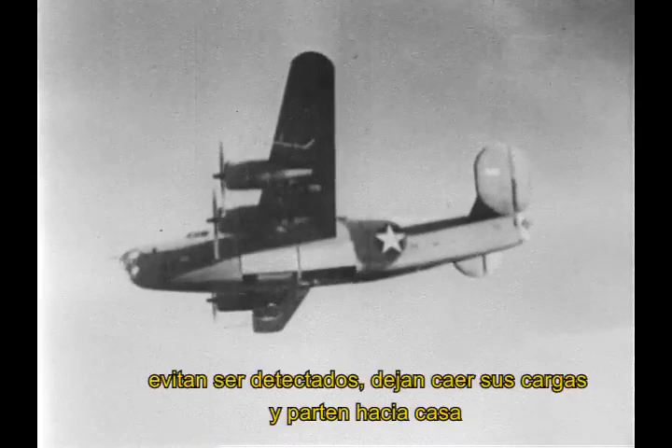A heavy bomber squadron takes off on a long-distance operation against the enemy. Flying with great speed at high altitudes, they avoid detection, drop their loads, and are off for home before enemy fighters and pursuit planes can possibly climb 25, 30,000 feet or even higher. In these cold substratosphere regions of the sky, where the air is so thin it affects engines as well as men, the fastest enemy planes are no match for our B-17 or our B-24s, which return safely to their bases.

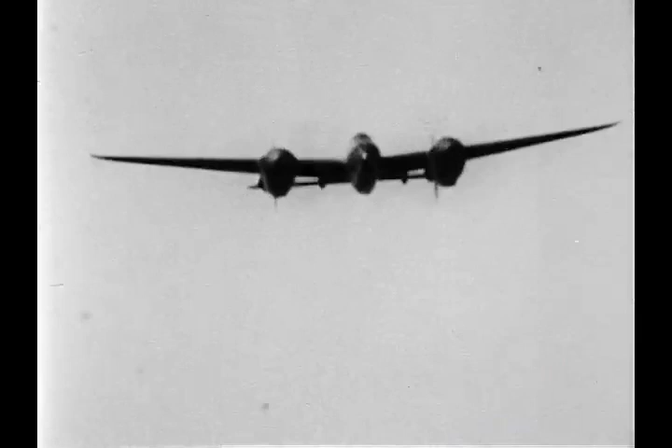Air supremacy is a vital factor, perhaps the deciding factor in this war. The achievement of air supremacy involves speed, personnel, firepower, and maneuverability.

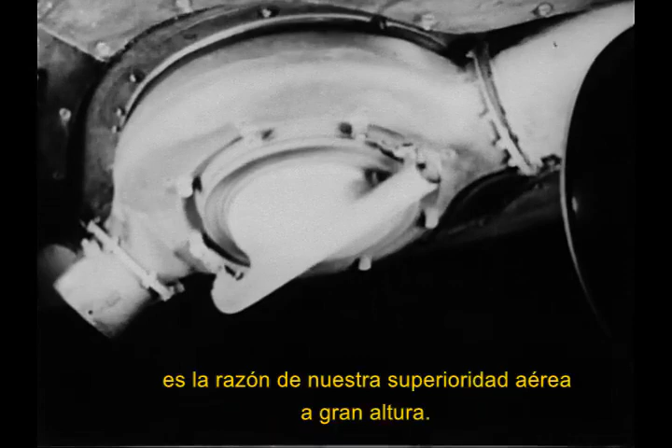But one of the most important factors is the ability to achieve maximum altitude without the loss of power. The Civil War maxim of getting there fastest with the mostest men can be revised in terms of military aviation to getting up higher with the mostest fighting power. This master of the skies, the dynamic turbo supercharger, is the reason for our air superiority at high altitude.

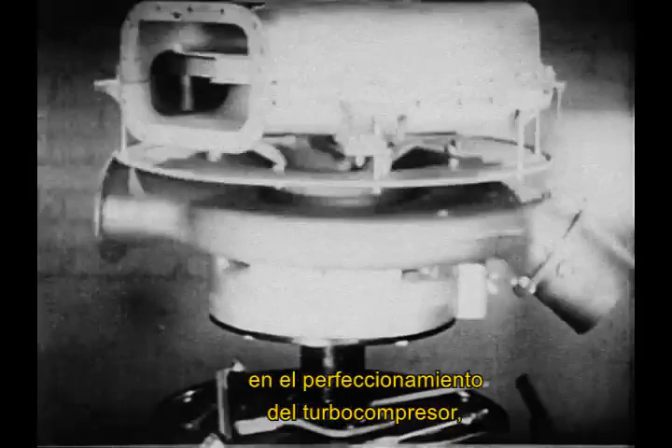For the year 1941, the Collier Trophy, one of the highest honors in aeronautics, was awarded jointly to Dr. Sanford A. Moss and the Army Air Forces for 25 years of collaboration in perfecting the turbo supercharger, which is playing a leading role in sweeping our enemies to defeat.

The turbo supercharger makes possible high-altitude flying with full engine power. An airplane engine derives its power from explosion of a mixture of air and gasoline. At altitudes above sea level, the air gets thinner and thinner. Therefore, these explosions get weaker and weaker.

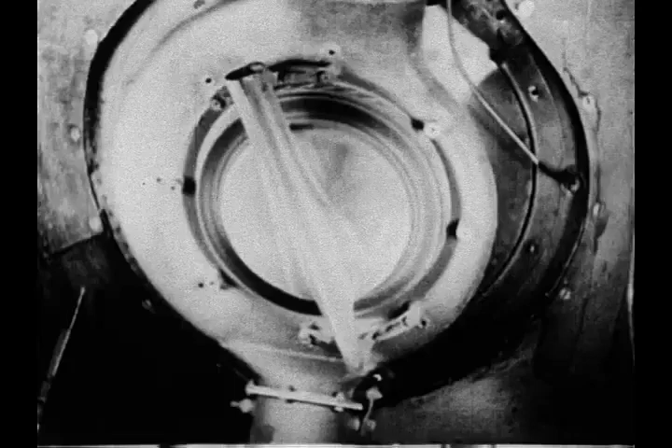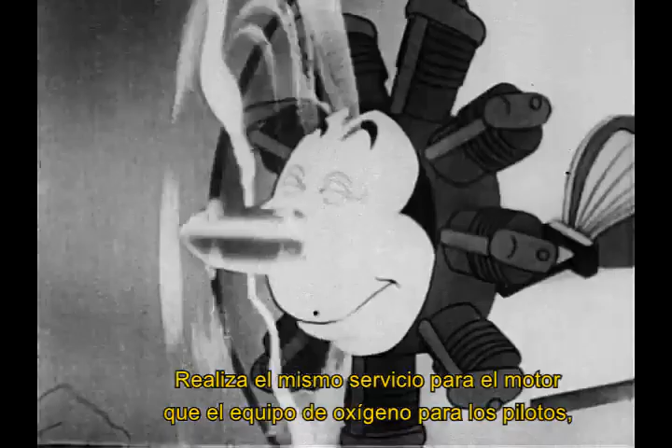At 20,000 feet, an unsupercharged airplane engine gives but one-half its normal power. At 35,000 feet, only a quarter of its power. The turbo supercharger counteracts this loss of power by compressing and cramming air into the engine, thereby maintaining proper manifold pressure to give full power at high altitude. It performs the same service for engines that oxygen equipment performs for pilots, kidding the engine into thinking it is always working at sea level.

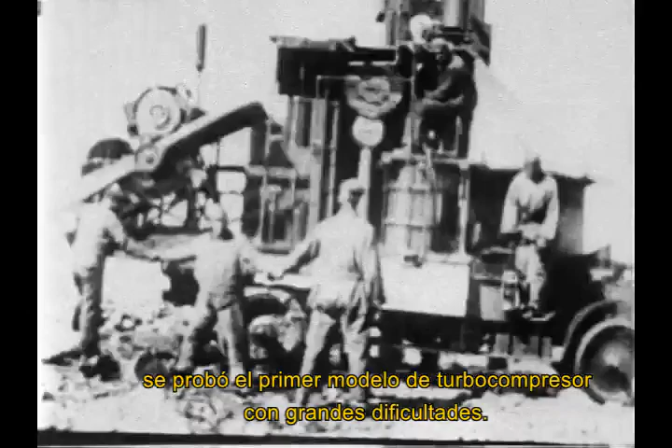Without a turbo supercharger, the engine gasps for breath. During World War I, the first model turbo supercharger was tested under great difficulty, on a truck at the summit of Pikes Peak, 14,100 feet above sea level.

The Liberty engine developed 400 horsepower at sea level, but moving up to 14,000 feet, it dropped to 265 horsepower. Then the turbo supercharger not only boosted it up to 400 horsepower, but to 410, or 10 more than normal at sea level.

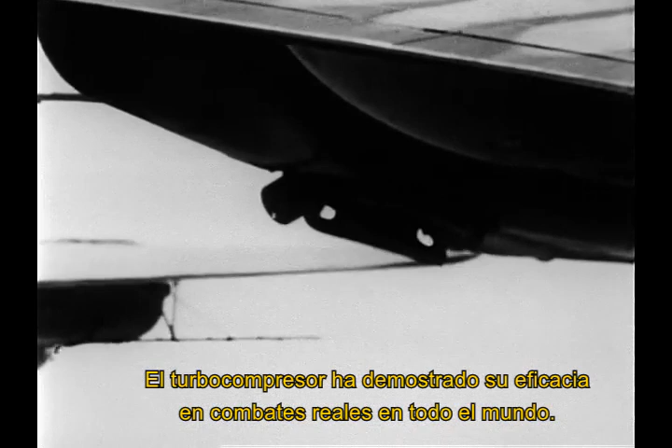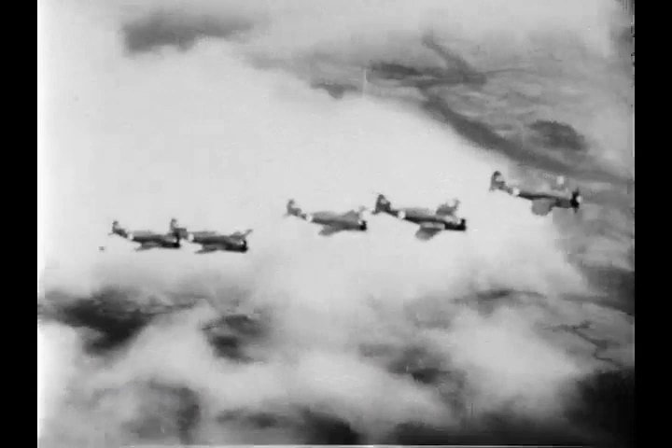The turbo supercharger has demonstrated its worth in actual combat all over the globe. Our great bombers, the Boeing B-17 Flying Fortress and Consolidated B-24 Liberator, together with the Lockheed P-38 Interceptor, the P-43 Lancer, and the deadly Republic P-47 Thunderbolt, are all turbo supercharger equipped, which enables them to fly and fight effectively at great heights above the earth.

Our turbo supercharged interceptors and pursuit planes can get on top and stay on top of anything the enemy has to offer. These tactical advantages are the key to air supremacy and ultimate victory.

Turbo superchargers permit our bomber pilots to avoid bad weather, even storms, by climbing over them, making it possible to fly at altitudes and speeds which result in maximum engine efficiency.

Obviously, we have a decided edge when we can bomb the enemy with a minimum of danger to our planes and personnel. Flying turbo-supercharged planes, our boys have bombed enemy objectives with amazing accuracy from heights where they were invisible and unheard from the ground. There had been no warning sirens, no opportunity to take shelter, only the sudden scream and paralyzing flash of falling out of a clear sky.

Almost without exception, these planes have returned safely from their mission. Time after time, you have read of our big bombers returning unscratched from perilous raids in all theaters of the war. It is true that our heavy bombers have been in dogfights, have suffered casualties in men and planes, but...

In practically every instance, this has happened when planes were operating at levels below 25,000 feet. Another reason we have to get up higher and higher is to get above the effective range of anti-aircraft fire, which has been reported even above 30,000 feet.

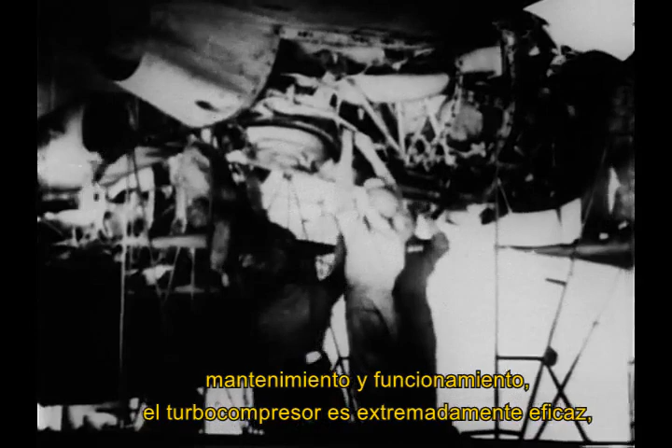With proper care in installation, maintenance, and operation, the turbo supercharger is extremely effective, reaching its full power and efficiency at 25,000 feet or higher.

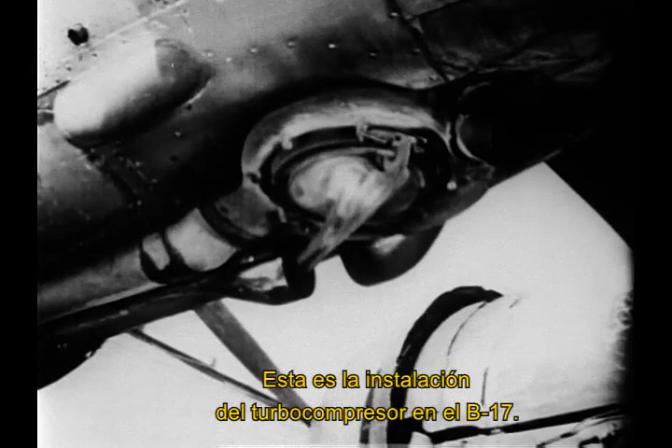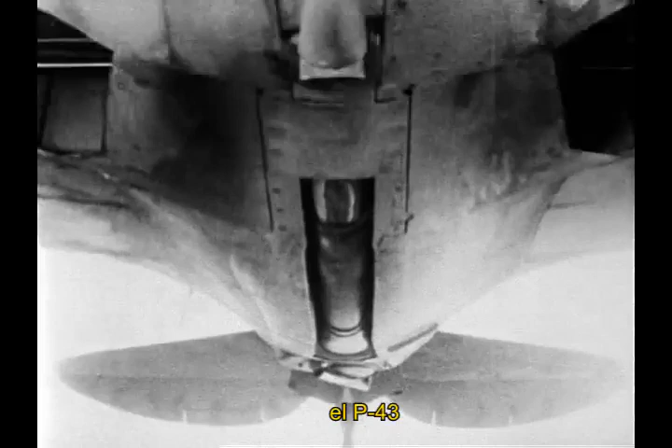This is the turbo supercharger installation in the B-17. Installations vary according to the different types of ships, such as the B-24, the P-38, the P-43, and the P-47, where it is submerged in the fuselage.

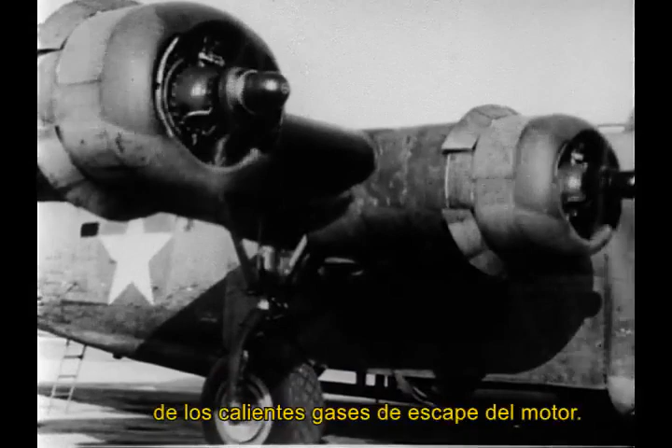A turbo supercharger is driven by the terrific impulse of hot exhaust gases from the engine. It largely uses waste power.

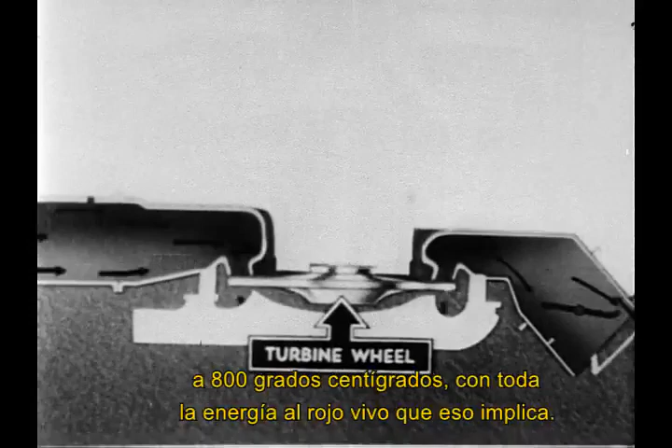Waste exhaust gases pour into the nozzle box, where they are directed onto a metal windmill or turbine wheel at 1,500 degrees Fahrenheit, with all the red-hot energy that implies.

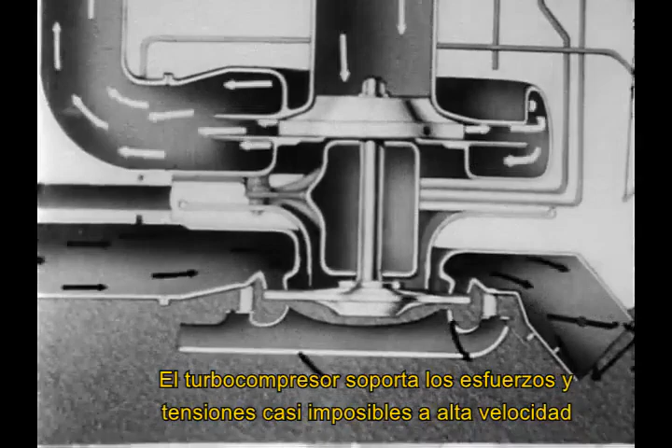This blazing force spins the turbine wheel at terrific speeds, up to about 20,000 revolutions per minute. The turbo supercharger stands the gaff of almost impossible high-speed strains and stresses, and still performs its task at temperatures ranging from 1,500 degrees above to about 67 degrees below zero Fahrenheit.

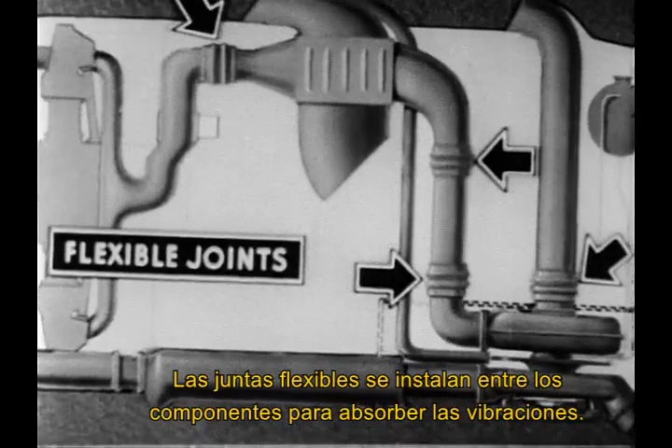The basic principle of all turbo supercharger installations is outlined in this diagrammatic drawing. Flexible joints are installed between the component parts to absorb vibration.

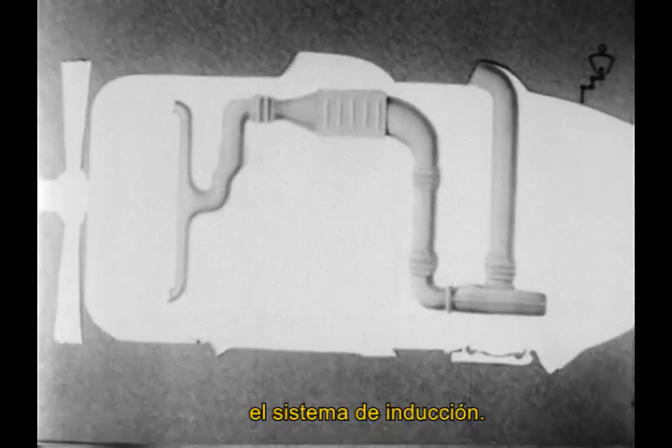For purposes of clarity, we will divide the system into 5 parts: 1, the induction system. 2, the exhaust system. 3, the ventilating or cooling system. 4, the control system. And 5, the lubrication system.

Individual installations vary according to the different design of ships, but their functions remain the same.

The induction system comprises rammed air intake in the engine nacelle or in the leading edge of the wing. The speed of the plane rams air into these intakes and assists in keeping up pressure.

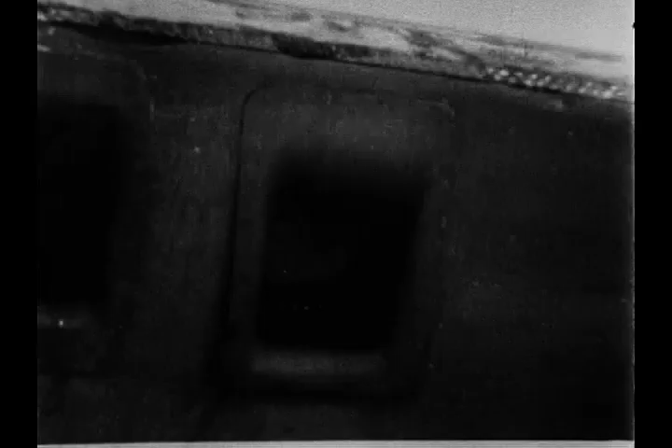Ducts carry this air to the compressor, where it is compressed and forced through the intercooler and the carburetor to the inlet of the geared supercharger.

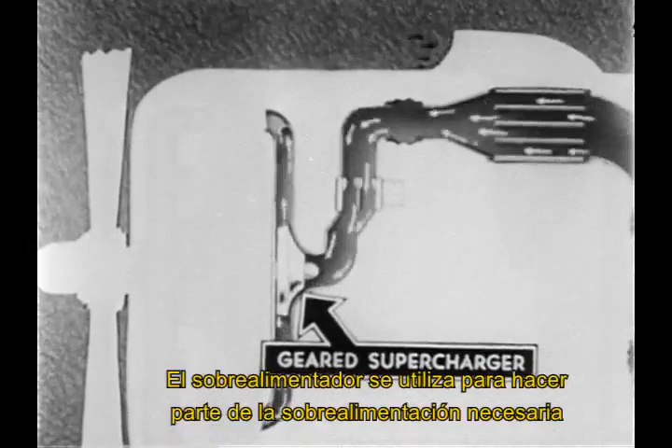The geared supercharger is used to do part of the required supercharging and to improve the distribution of the fuel charge to the cylinders.

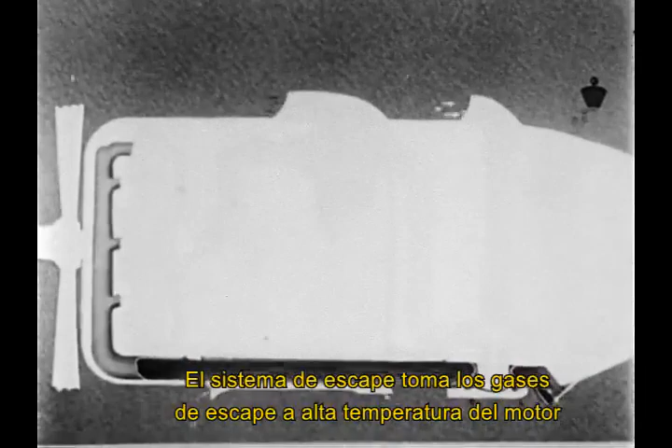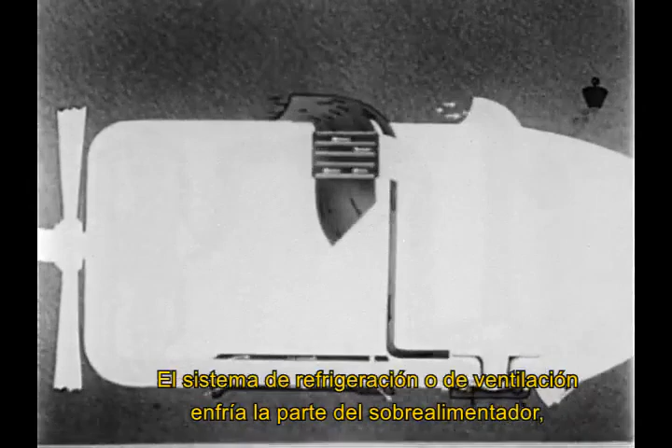The exhaust system takes the high-temperature exhaust gases from the engine to turbine wheels or out through the wastegate to the atmosphere. The cooling or ventilating system cools the supercharger parts, thus preventing damage due to the high-temperature exhaust gas.

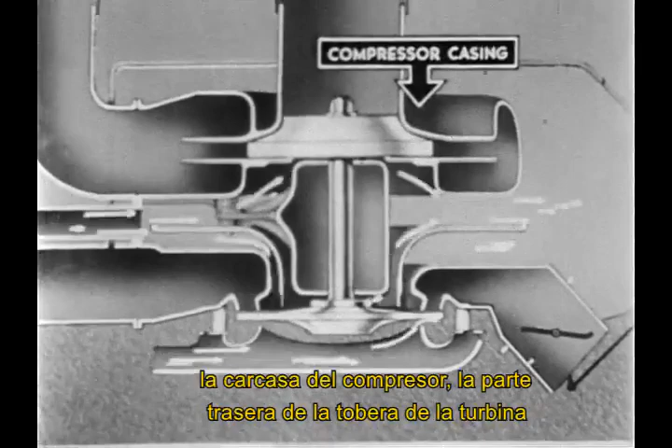Rammed air is carried through ducts to the turbo, where the stream is split by the baffle plate and cool air forced against the bearing housing, compressor casing, the back of the turbine nozzle box, and the back of the turbine wheel. Other ducts perform the same functions in relation to the exhaust stack shroud, which insulates the exhaust stack,

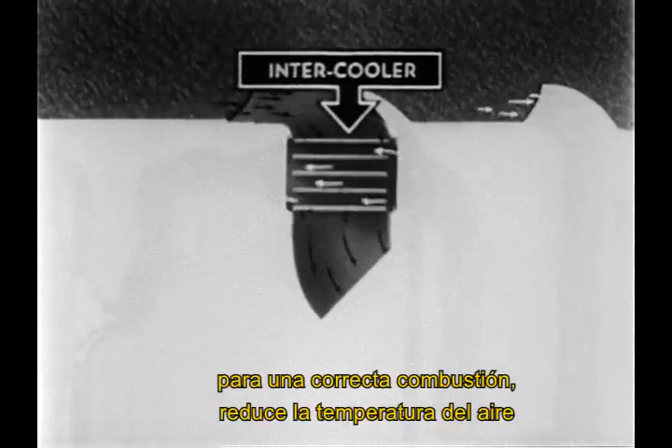and the air intercooler, which for proper combustion reduces the temperature of the air fed from the compressor to the engine. The intercooler cools air in the same way the radiator on your car cools water.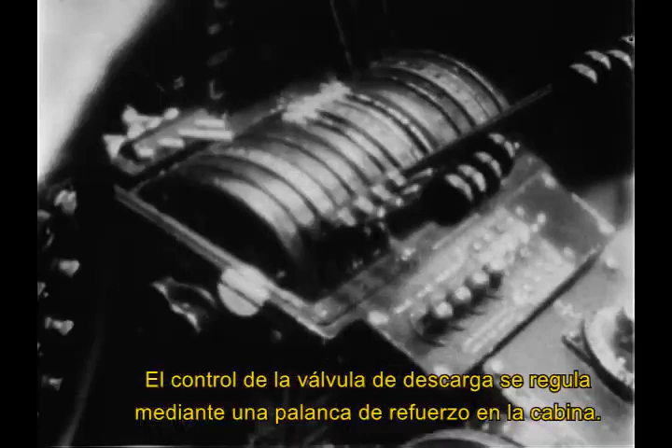The turbo supercharger is controlled by a hydraulic regulator, which operates the wastegate in response to pressure changes in the exhaust stack. The wastegate control is adjusted by a boost lever in the cockpit.

The wastegate controls speed of the supercharger by bypassing the gases around the wheel. With the wastegate open, the turbine will idle. Closing it by degrees enables the turbo supercharger to operate at required speed.

Lubrication is accomplished by a gear-driven pump. One element of the pump takes oil from the tank and supplies it under pressure to the moving parts. The second, or scavenging element, returns the oil to the tank.

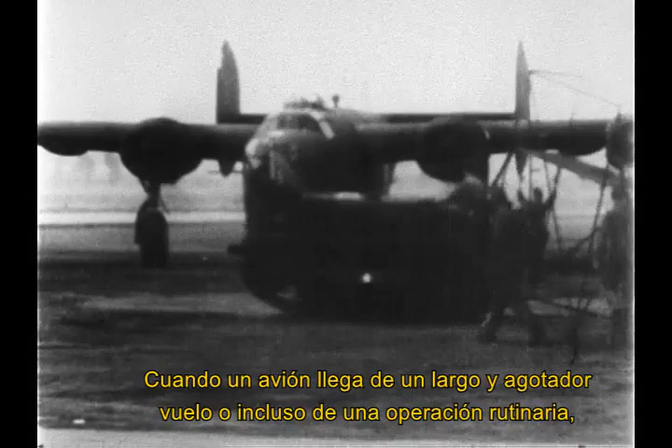When a ship comes in from a long, grueling flight, or even a routine operation, the pilot knows that the ground crew will assure the success of his next mission by a thorough inspection.

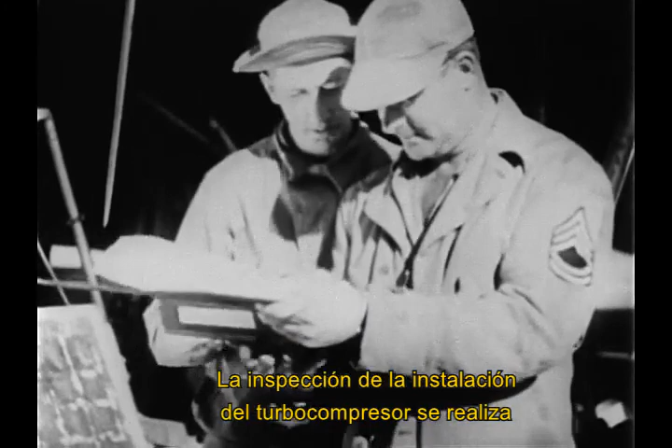The inspection of the turbo supercharger installation is performed in accordance with Army Air Force's technical orders.

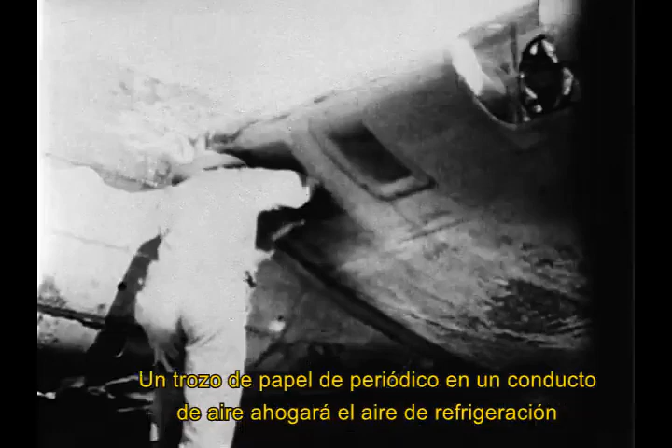Air ducts running from the nacelles or from the leading edge of the wing must be kept clear at all times. A piece of newspaper in a ram air duct will choke off cooling air, which is absolutely necessary for proper performance. Men are sometimes careless and step on louvers, blocking the flow of ventilating air. Ducting must be examined for broken connections, cracking, and chafing.

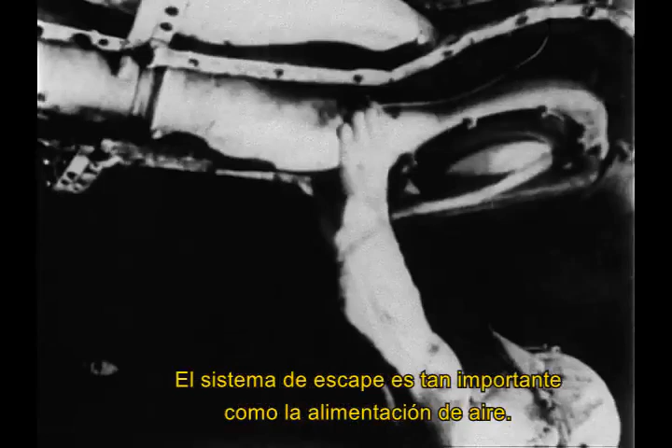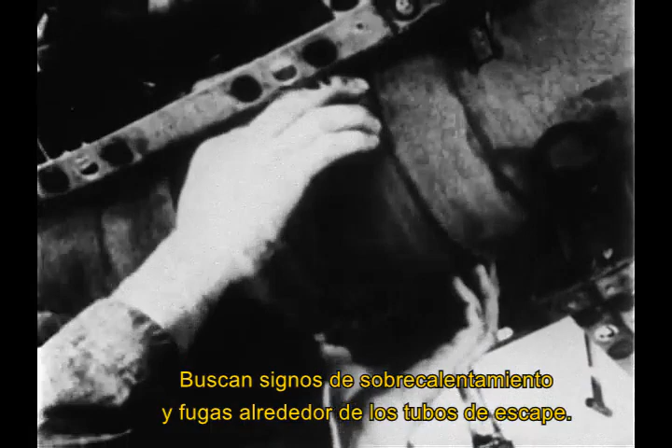The exhaust system is equally as important as the air feed. All joints in the exhaust system must be inspected for gas leakage, with special attention to flexible joints. Look for signs of overheating and leaks around exhaust piping. One small leak might rob the engine of that vital extra few miles an hour which marks the difference between victory and disaster. Leakage can be detected when the engine is started.

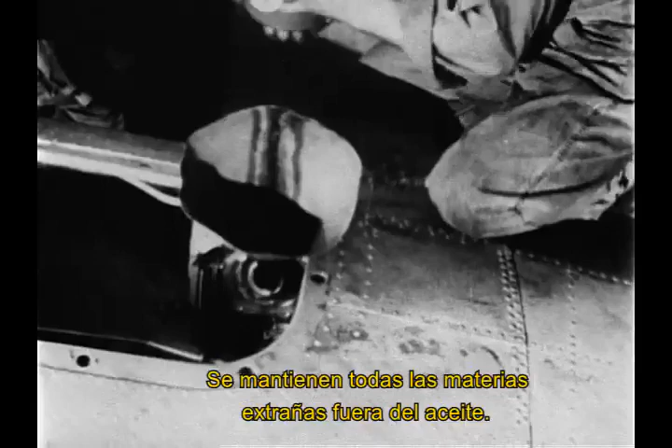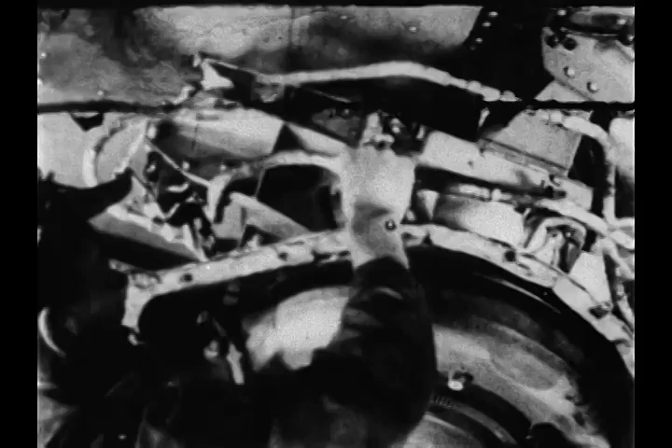In the lubricating system, check oil level in the tank. Keep all foreign matter out of oil. Note and record excessive oil consumption. Keep oil tank vent clear. Report signs of oil foaming or mist. Inspect all pipelines and connections, including the turbo supercharger regulator, for oil leakage and security.

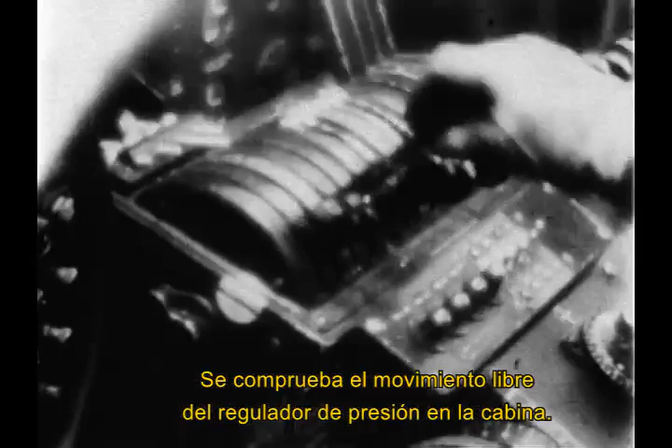When inspecting the control system, check free movement of the regulator in relation to open and closed positions of the wastegate. Check free movement of boost control in the cockpit. Be sure the turbo regulator locking device operates correctly.

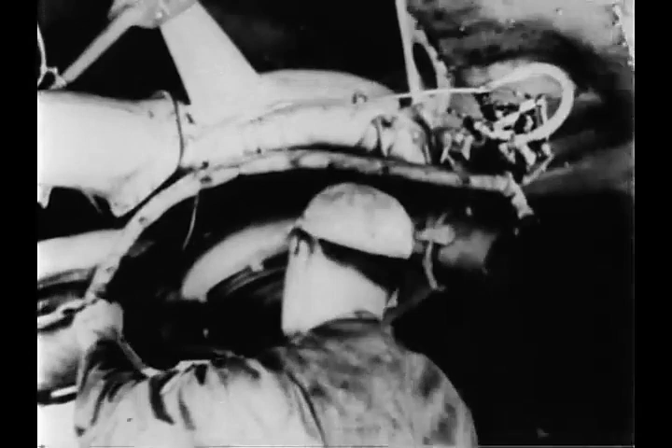The pressure regulating pipe should be disconnected at both the exhaust manifold and regulator. Blow air through and record any water condensation, carbon, or other foreign matter. Water will freeze and foreign matter clog the pipe. Test the pipe to make sure there is no leakage. See that the regulating pipe orifice in the exhaust manifold is free from carbon or corrosion.

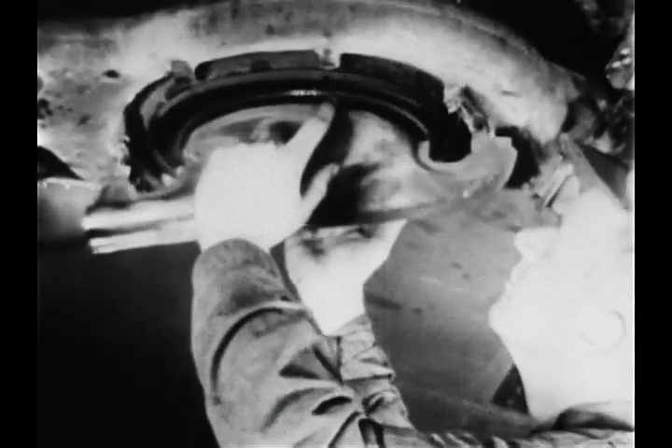Inspect the turbo supercharger to see that it is firmly in place. Inspect the nozzle box for deformation or cracking. Turn the turbine wheel by hand, feeling for any obstructions or tight spots. Listen closely for strange noises or rubbing, which might be caused by foreign matter on the back of the wheel. Examine the wheel for signs of overheating. Inspect the bucket for alignment and deformation. The cooling cap is always taken off and is replaced by a cover cap to protect the turbine wheel.

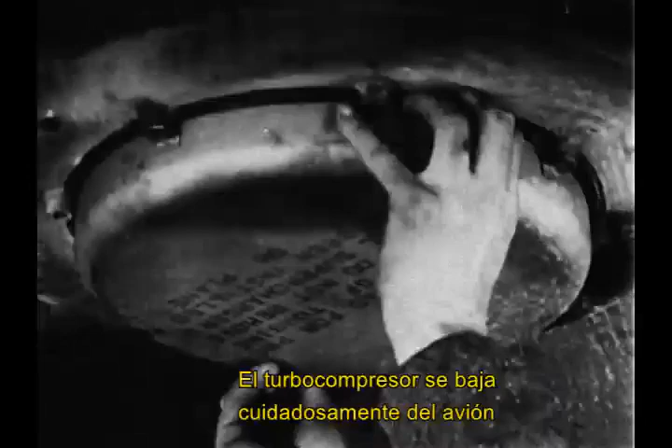The turbo supercharger is carefully lowered from the plane and starts its journey to the overhaul depot.

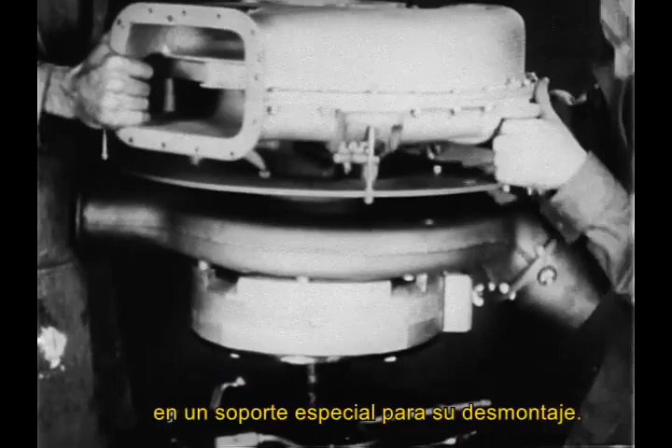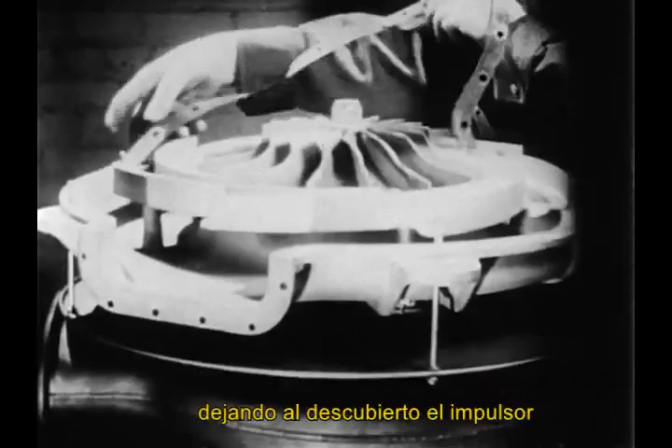At the depot, the supercharger is placed wheel down on a special stand for disassembly. After proper clearances are taken, the rear compressor casing and gasket are removed, revealing the impeller and diffuser. The impeller is on the same shaft as the turbine wheel and discharges air through the diffuser to the compressor casing, which collects the compressed air and feeds it to the engine.

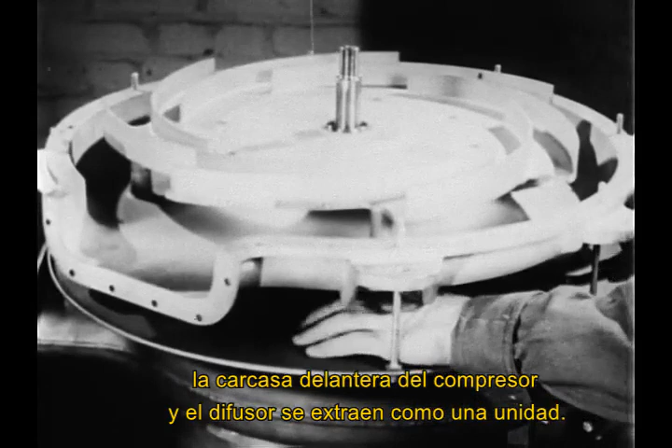After removing the impeller, the front compressor casing and diffuser are taken off as a unit. Note that we are working from rear to front, as the turbine wheel side is always called the front, regardless of position. This disassembly appears very simple.

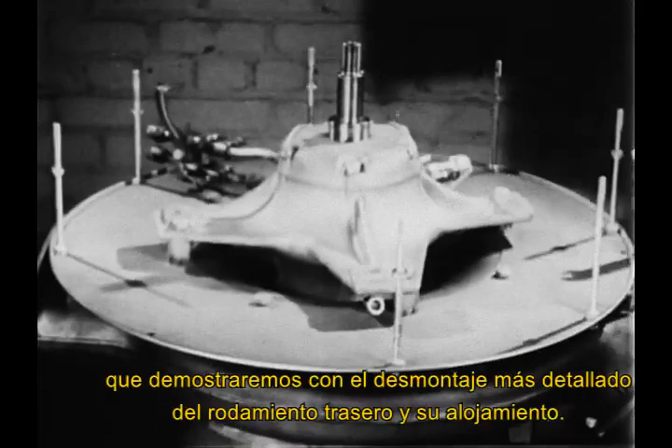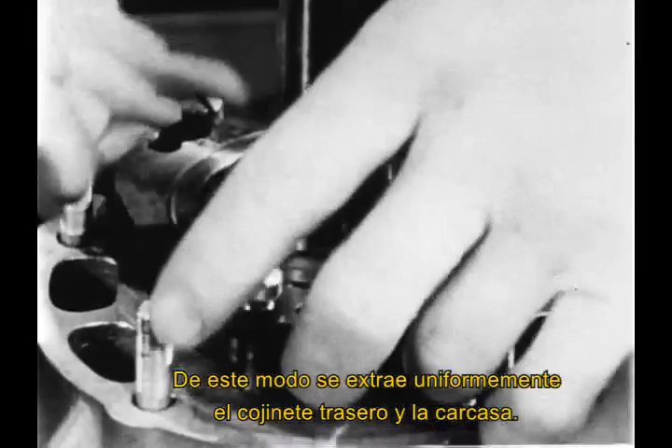Actually, it is a long and careful process, which we will demonstrate by the more detailed removal of the rear bearing and its housing. Safety wires are cut and the 3 retaining screws taken out. The rear bearing clamp washer is lifted off, and the same 3 retaining screws are inserted in the threaded jacking holes in the flange of the rear bearing housing. Each of the 3 screws is turned a little at a time, one after another, thus evenly jacking out the rear bearing and housing. The rear bearing is a ball bearing.

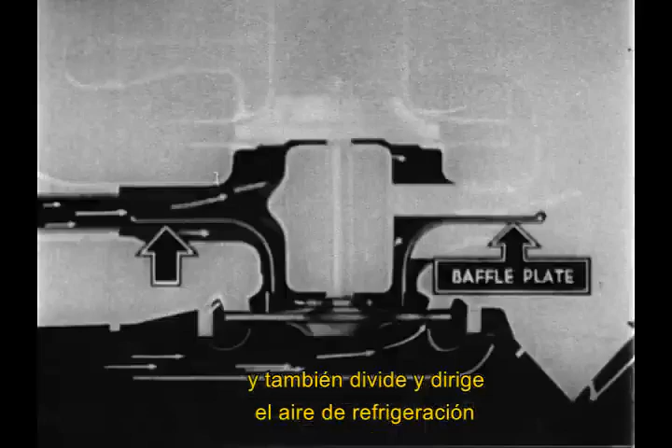Next, the bearing and pump casing is removed. The oil pump is operated by this drive sleeve, which is locked onto the shaft with the Woodruff key. Then the front bearing, which is a roller bearing, is removed. The baffle plate is a radiation shield and also divides and directs rammed cooling air against the bearing and pump casing, front compressor casing, the back of the turbine nozzle box, and the back of the turbine wheel.

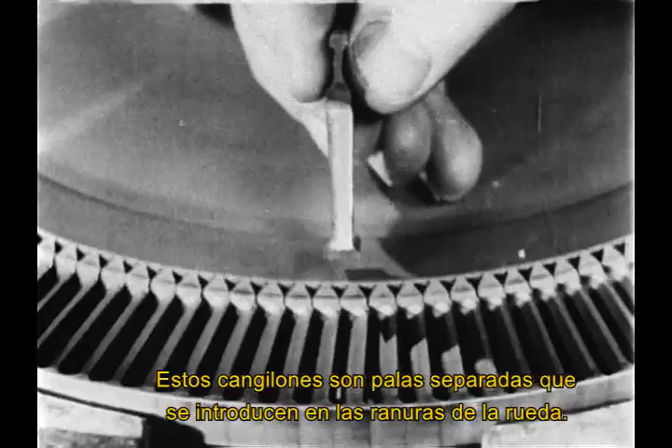A series of blades in the nozzle box directs the high-temperature exhaust gases onto the buckets of the turbine wheel. These buckets are separate blades driven into slots in the wheel.

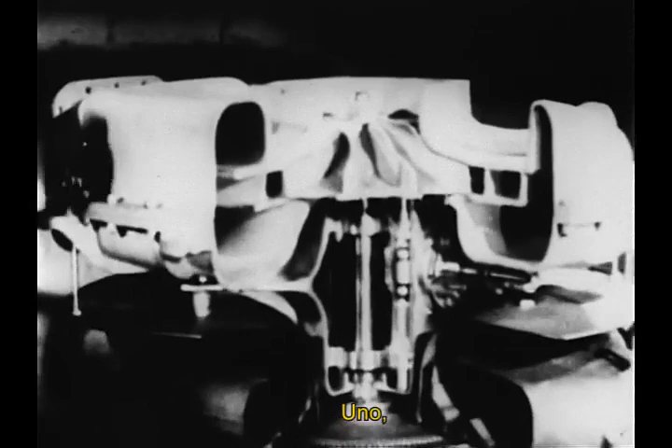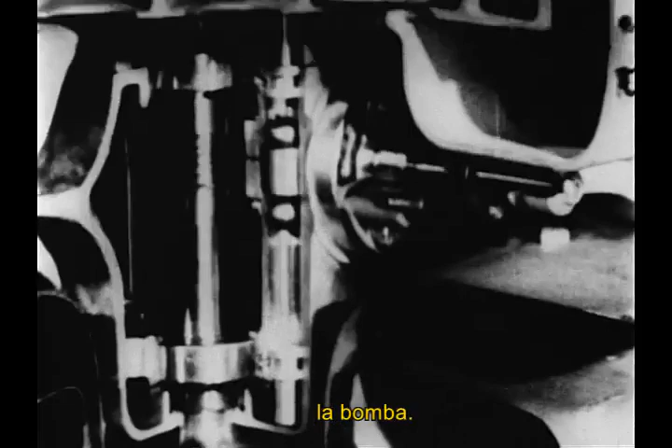During disassembly, 5 clearances are taken: 1, annulus; 2, blade side of impeller to rear compressor casing; 3, plain side of impeller to front compressor casing; 4, pump backlash; 5, between turbine wheel and nozzle box.

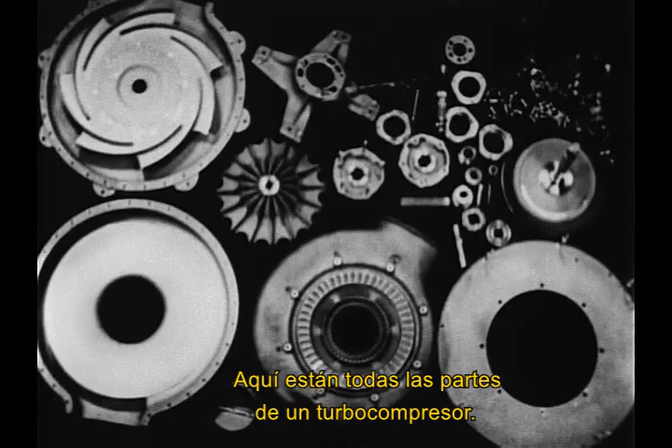Here are all the parts of a turbo supercharger. The disassembly you have just seen in a minute or two actually takes a skilled mechanic several hours.

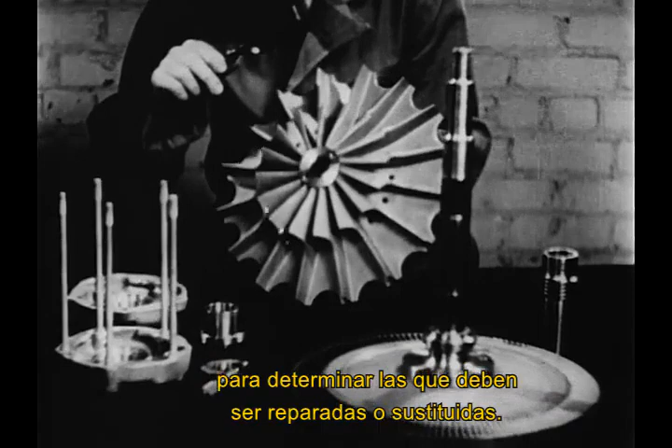After disassembly, careful inspection is made of all parts to determine those which are to be repaired or replaced. One of the most precise repair processes is proper balancing of the rotor unit. This balancing is necessitated by even minute differences in the parts as placed on the rotor assembly.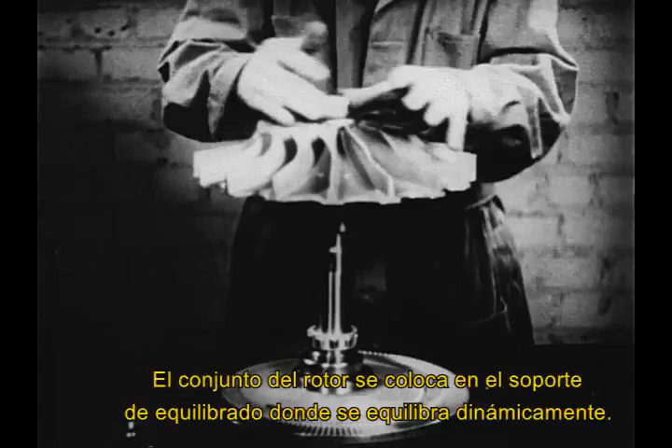The rotor unit is placed on the balancing stand where it is dynamically balanced. Running at speeds in excess of 20,000 RPM and in any position which the plane flies calls for more delicate balancing than a fine watch.

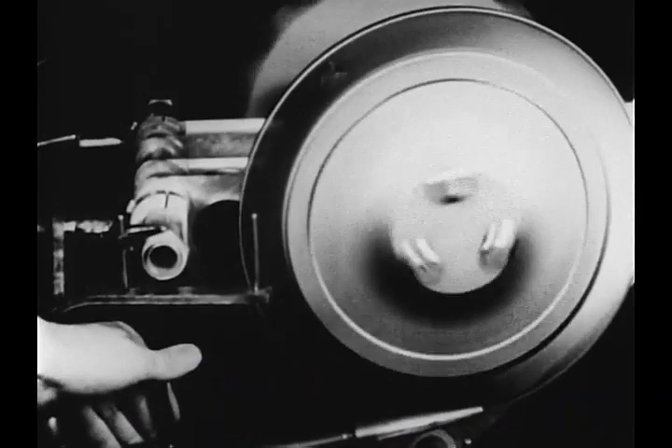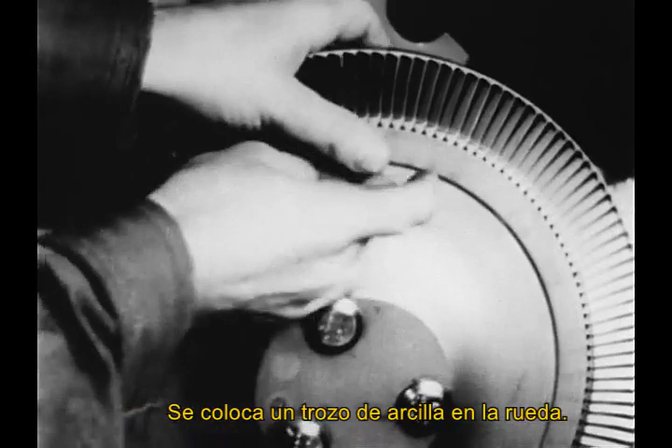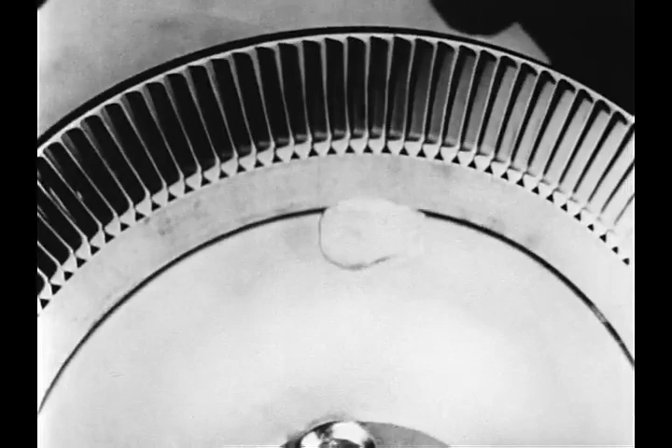A daub of clay is placed on the wheel, then shifted to find the point at which vibration becomes negligible. Then, from the diametrically opposite side of the wheel, enough metal is removed to offset the weight of the clay.

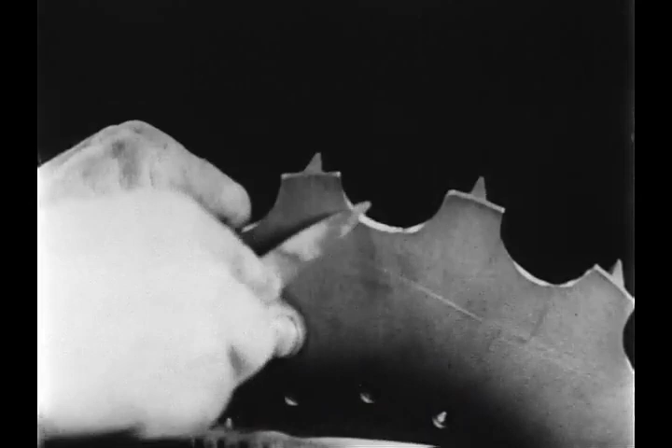The same balancing procedure is used on the impeller end of the rotor unit, and enough metal is removed to balance the impeller. After balancing of the rotor and assembly of the supercharger, it is ready to be returned to the flying field.

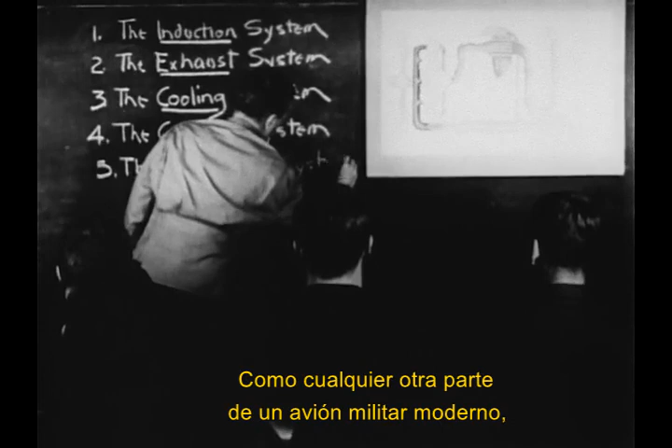Like every other part of a modern military airplane, the turbo supercharger must be understood by pilots, who should remember important instructions regarding control. Before starting the engines, be sure that the turbo supercharger is in the off position.

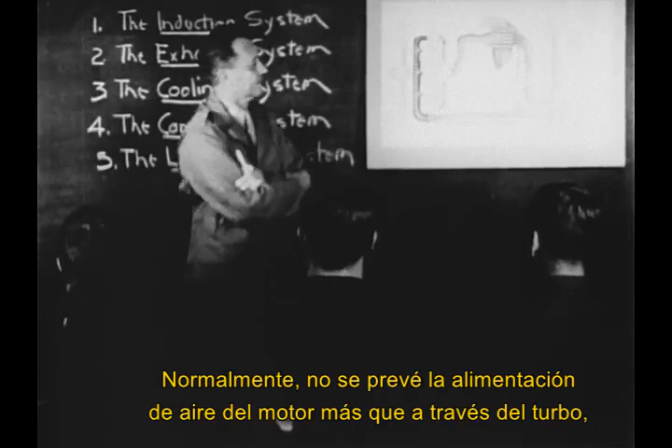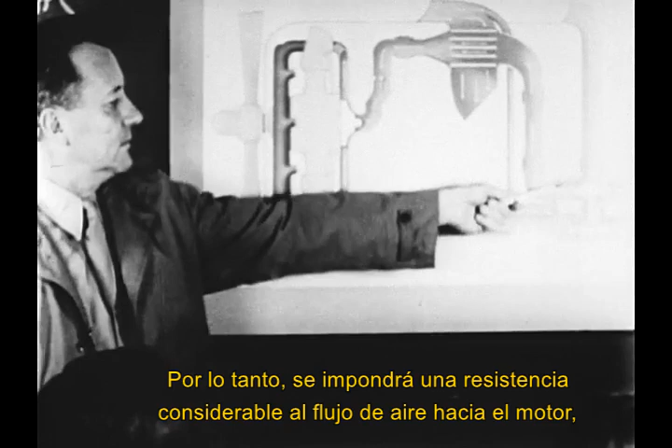No provision is normally made to supply engine air except through the turbo, its ducting, and intercooler. Therefore, considerable resistance will be imposed on airflow to the engine when the turbo regulator is in the off position. In order to obtain sufficient manifold pressure for takeoff power, it is necessary on some airplanes to use a small amount of turbo boost. Close the wastegate a little.

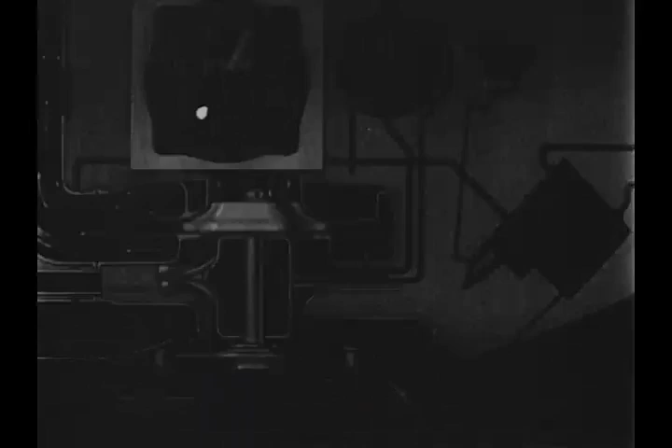Tactical requirements may dictate using military rated power for a period not exceeding 5 minutes. Climbs are usually made with about normal rated power. Small adjustment of the turbo control may be necessary during climb to keep manifold pressure at the desired level.

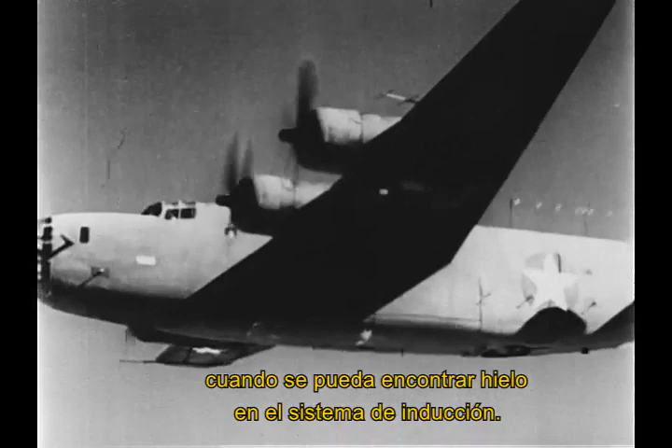For low altitude, low power cruising, when the geared supercharger is enough to provide proper manifold pressure, reduce engine throttle to maintain the desired manifold pressure. At high altitudes of more than 20,000 feet, it is not practicable to operate at very low engine speeds and power. Turbo superchargers should be kept engaged at all times when induction system icing may be encountered.

Above approximately 25,000 feet, manifold pressure should be reduced in accordance with the instructions given for each type of plane to avoid overspeeding the turbo supercharger. For gliding and approach for landing, the turbo regulator is set approximately at maximum cruise position to ensure power to go around the field again if necessary.

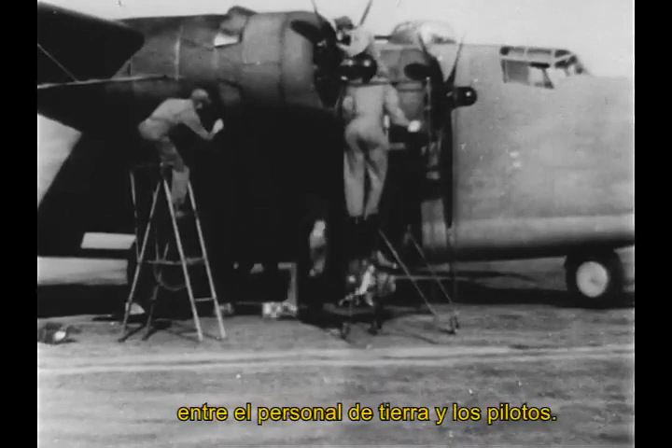The performance of ships equipped with turbo superchargers is a matter of teamwork between ground crews and pilots. It is not necessary for a pilot to learn all the mechanical details of construction, but it is for him to know what he can expect from a turbo supercharger when he needs its assistance to win the fight, save the lives of his crew and himself.

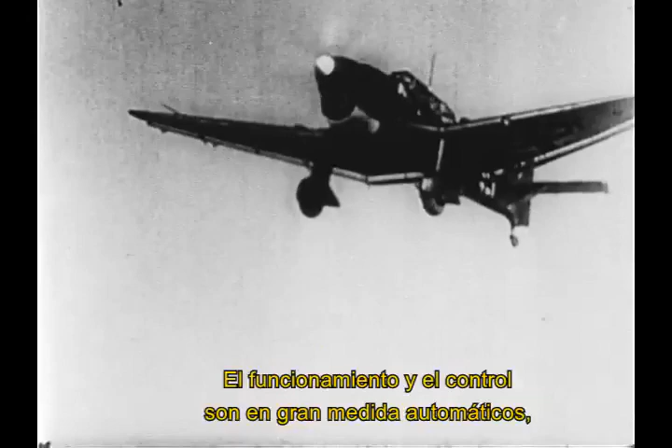The men who fly these powerful planes are going to depend upon their turbo superchargers in emergencies which will test all their skill, strength, and courage. Operation and control are largely automatic, but there are certain times when the pilot needs power and needs it instantly. These times occur under stress of actual combat conditions, and his reaction should be instinctive.

The pilot will depend upon this master of the skies to give him the edge of speed and maneuverability, which means the difference between defeat and victory in the substratosphere regions of the sky. It is with enormous pride in American scientific invention and mechanical ability we look at our interceptors and pursuit, which can get on top of anything that flies.

It is with a feeling of grim satisfaction that we know our bombers are able to shoot down or escape from anything the enemy can put in the air.

This edge is held only as long as the turbo superchargers on each and every one of these planes is kept at the peak of performance. They must answer every demand that the pilot makes. It's up to the ground crews to keep them flying, and flying higher and higher. Ride the master of the skies to victory.